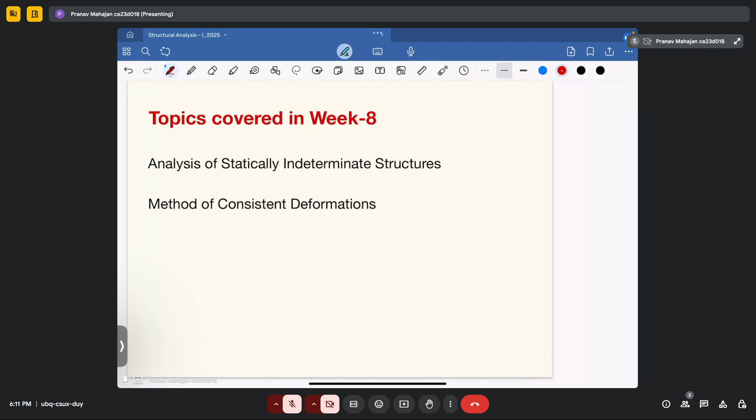Let me tell you a brief detail about method of consistent deformation. This method is also known as the force method.

So what you will do, you will apply a unit force and then you will see how the structure is behaving, and then we will apply the compatibility equation, and then we will determine the unknown force. So based upon equilibrium conditions as well as the compatibility equation, we will determine the unknown reaction, whatever the degree of static indeterminacy.

And finally, this method formulates a set of compatibility equations depending upon the number of redundants in the structures. Now, if I talk about the brief algorithm or brief steps that are involved in solving the problems related to force method, or for the current session, the method of consistent deformation.

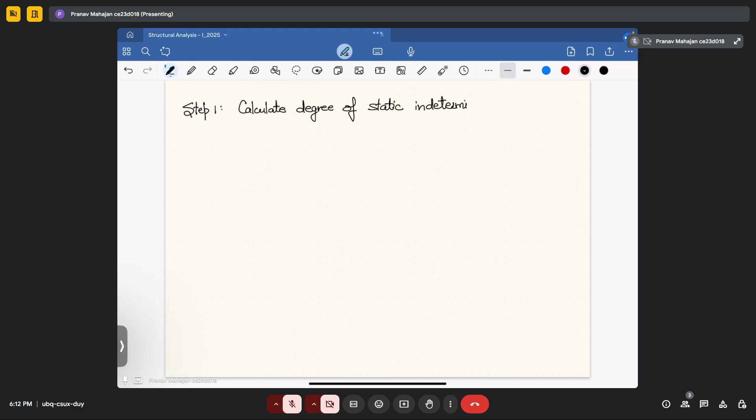So your step 1 includes calculation of degree of static indeterminacy. This is a brief overview about how the force method is utilized. So what you will do, you will first determine the degree of static indeterminacy. For trusses, we utilize m plus r minus 2j. This will give you the order of static indeterminacy in the structure. Then your second step includes...

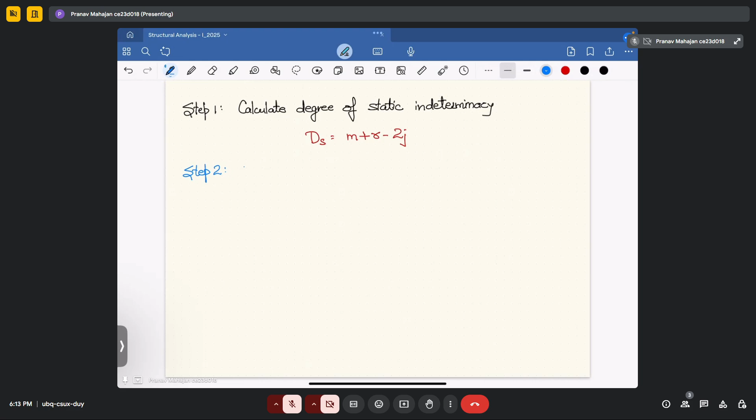Selection of redundant force and moments in the structure. So second step takes into account selection of redundant forces or moments that are there in the structure.

Okay, so your next step will tell you that you have to remove the indeterminacy and then find the solution of determinate structure. Like what you used to do in week number 3, wherein you have to calculate the deformations. So first you will calculate all the forces in the member due to external load, and when you apply the unit load, then you will see. So this is the third step, wherein first you will calculate the solution of the determinate structure.

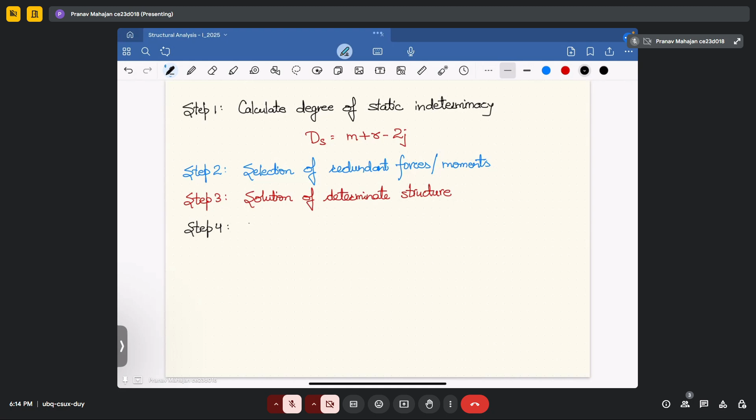So next what we will do, we will remove the redundancies from the structure, and then solve the redundant structure. Structure with redundant force is then analyzed.

And then finally what you will do, we will calculate deflection, for determinate structure in step number 3 that I have already mentioned, for determinate structure, and structure with redundant force. So for both these structures, we will determine the deflections.

And at last, what you will do, you will utilize compatibility equation and then determine the unknowns.

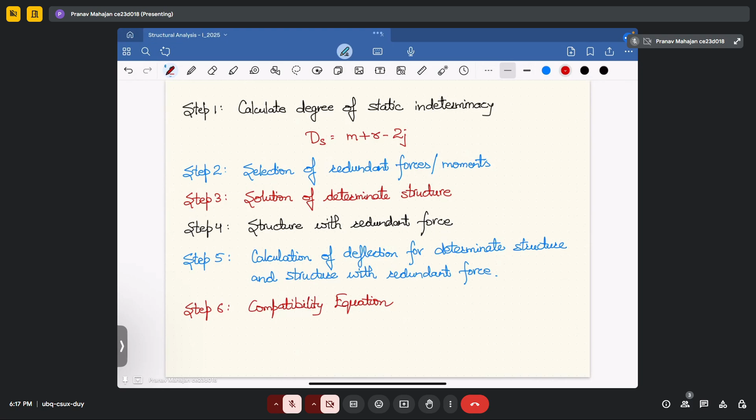Okay, so let's solve some problems related to that, that gives you clear understanding regarding this, and it will help you in understanding the concept further. So your first question is like a brush up for you regarding an indeterminate beam, how you will calculate the reaction forces. So what you will do in this case, as we have already seen in the previous week, for different beams, how you will determine the deflections at different points.

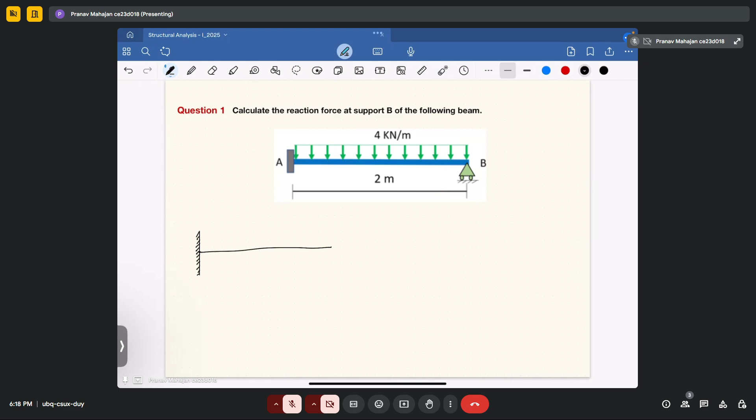So for this structure, this is your prop cantilever. Using the superposition principle, first I will split this whole structure into two parts. So what I will do, I will make this as a cantilever beam subjected to a uniform distributed load over the length.

Plus, what I will do, I will take another cantilever beam which is subjected to concentrated force, which is the reaction due to the prop support. I will mark it as RB at the free end of the beam. So now if I mark the loading, your loading is 4 kilonewton per meter along the length of 2 meters. Okay, so now you can see your structure A and structure B are now determinate.

Okay, so now what I will do, I know that due to the hinge support or roller support at point B, your deflection at the support B will be 0. That I already know, because at the support B you have the vertical reaction which is making the structure have 0 vertical displacement at that particular point. So that concept I have utilized, and that becomes my compatibility equation.

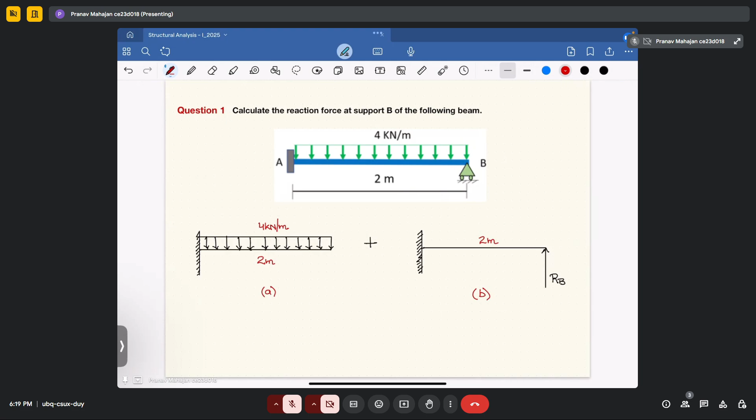Okay, so what I will do, I will first calculate the deflection due to structure A. Okay, so as I already know, due to structure A, my deflection at free end B, let me write it as end B, and this is your end A.

Okay, so due to structure A, deflection at free end B will be equal to - please see the previous results that we have already discussed. It would be WL to the power 4 divided by 8EI.

So in week number 7, we have discussed a table in which there are problems or standard results, how you will get the deformations at different standard results. And if you want to verify, you can use conjugate beam method and moment area method to get these standard results.

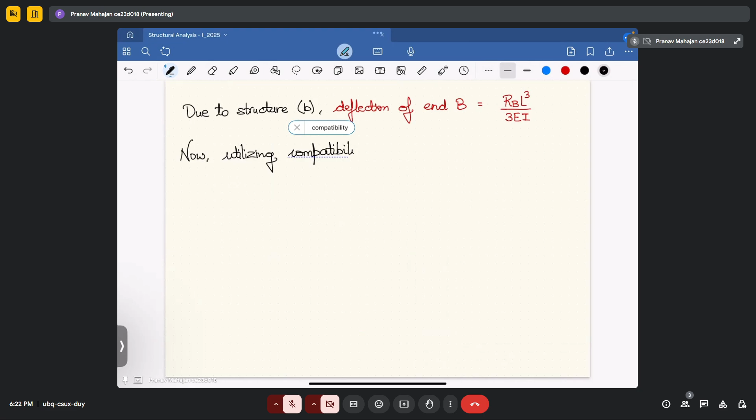Fine. So now utilizing compatibility equation, which says that deflection at roller support B, in case of propped cantilever beam, is 0.

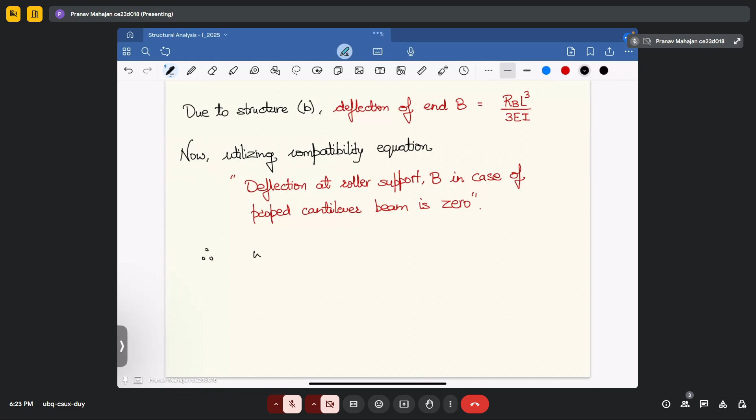Okay, so therefore your compatibility equation will become WL to the power 4 divided by 8EI minus RB L cube divided by 3EI. Let me write, due to structure B, the deflection to be negative, because out of this one will be positive. I think you can write this to be positive and this to be negative. Fine. Okay, so this will become equal to 0.

Now, if you solve for RB, you will get RB to be equal to 3 by 8 into WL. Now substituting the value of W and L in this, so what you will get, 3 by 8, your W is 4 and your total length is 2, and that will give you the reaction at B to be equal to 3 kilonewton.

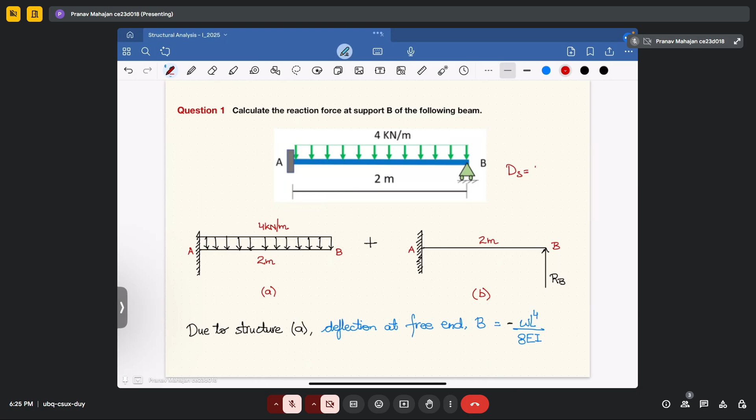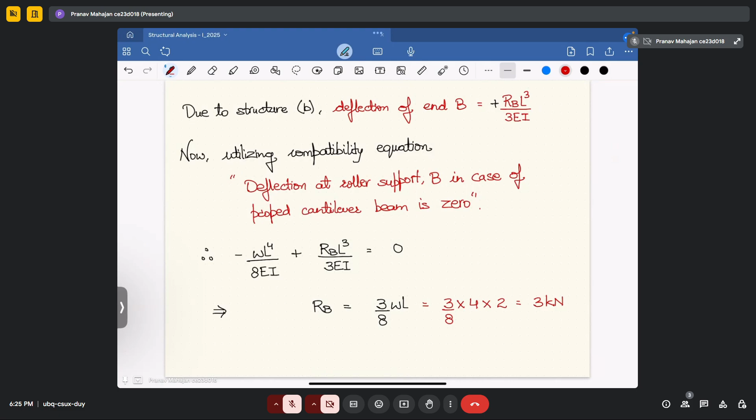So this is how we will solve the problems using force method, wherein first we will determine the degree of static indeterminacy. So in this case, the degree of static indeterminacy is 1. Okay, and then we will remove one redundant force, so that's why we have removed the roller support. And then we have solved the problem by considering the determinate structure, and then after that we have applied the unknown force and we have seen how the deformations are occurring at that, and then utilizing the compatibility equations we got to know the value of unknowns at different points. Okay, fine. So let's move further.

So your next question is, you have to determine the horizontal reaction force at support B of the following truss. Consider AE, or you can say axial rigidity, to be constant for all the members.

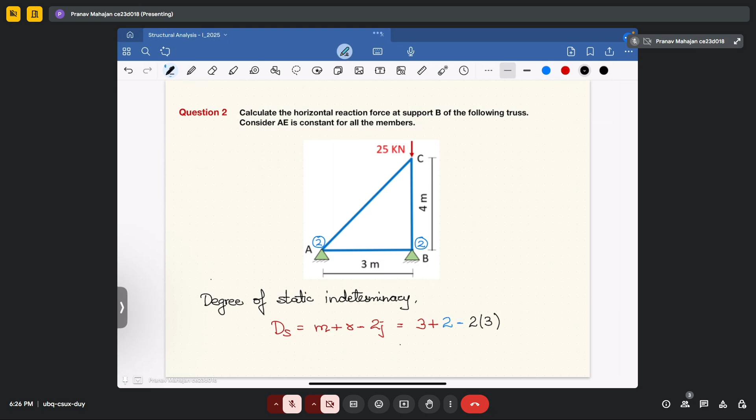Okay, so if you solve for this, first what we will do, we will determine degree of static indeterminacy. So for the case of truss, we already know ds will be equal to m plus r minus 2j, and in this case your m is 3. Your reactions here are, at A reactions are 2, at B reactions are 2, horizontal and vertical. So I think your reactions are 4 - I wrote it wrong. So your reactions are 4. Number of joints are 3, and that will become 2 into 3. So you will get your degree of static indeterminacy to be equal to 1.

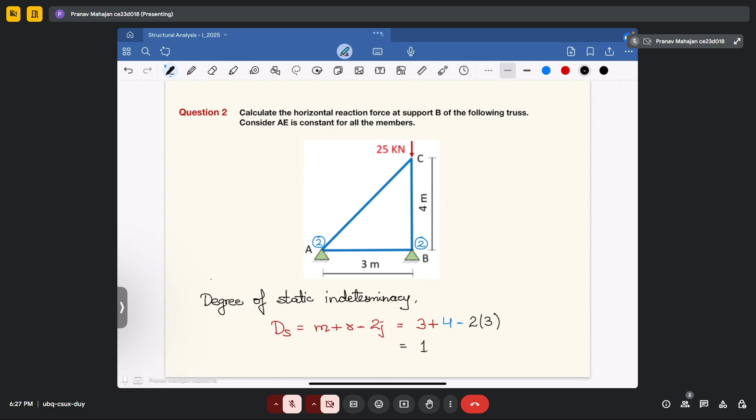So that means your structure is indeterminate of first order. You can remove either one of the forces which are unknown and then try to solve the forces.

Okay, so let's assume in this case your horizontal reaction at support B to be the redundant force. So let me write that - let the horizontal reaction at support B be the redundant force. Fine.

Okay, so then using method of consistent deformations, so what you can say is that your summation of PKL upon AE minus HB into summation of K square L upon AE to be equal to 0.

So now you have one truss, and it is subjected to a point load at the top, and you have the corresponding hinge at one end, and because of removing the horizontal force, this support will serve as a roller on the other end. So now your structure is determinate.

This is your length of 3 meter. This is your maximum load, or the load that is occurring at the top, 25 kilonewton, and this length is 4 meter. Now we have to find the forces in all these members.

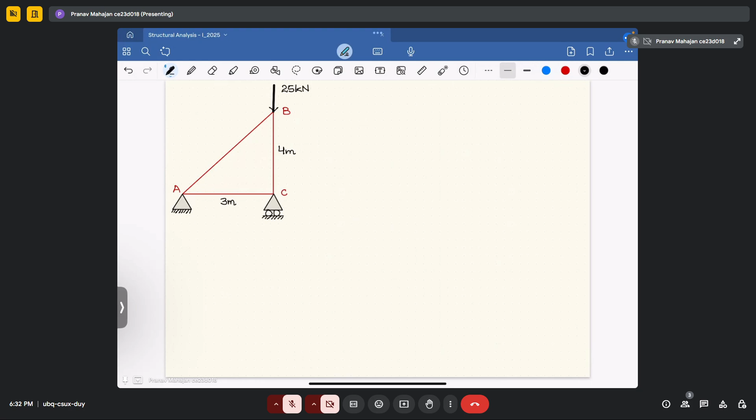Utilize the principle of method of joints to determine the reaction forces in all the members. So your forces in the member, how will it look like?

I am writing the values, and you will confirm that by applying the method of joints. So in this, how many members do you have? You have AB, BC, and CA.

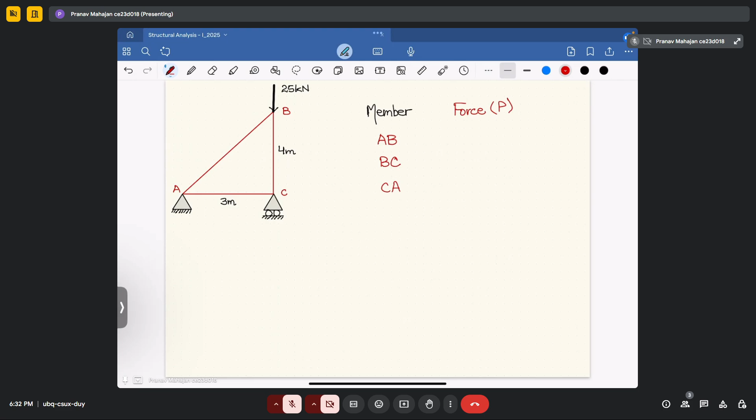So if you start with joint B, in case of joint B, if we take summation of horizontal force to be equal to 0, you will get the force in member AB to be equal to 0, and your force in member BC will come out as 25 kilonewton.

Now, if I take another joint, that is joint C, as we have already calculated, you will get the BC force to be 25, that means your reaction force will also be 25. So if we take the horizontal force equal to 0, that's why the force in member AC or CA will come out to be equal to 0.

So now you have calculated all the values of P. Now you have to calculate the values of K. So how will you do that? For that...

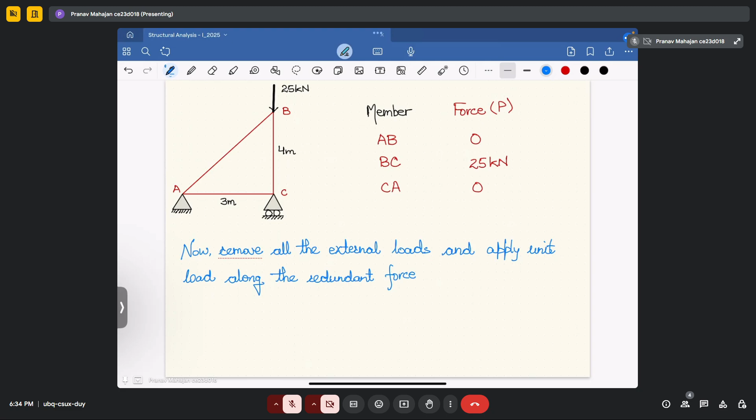Now we will remove all the external loads and apply a unit load along the redundant force. Since we have removed the horizontal force as the redundant force, we will apply unit load in this direction, and the member forces due to that will be represented as K.

So the member forces due to unit load is represented as K. Let me take this diagram and apply a unit load.

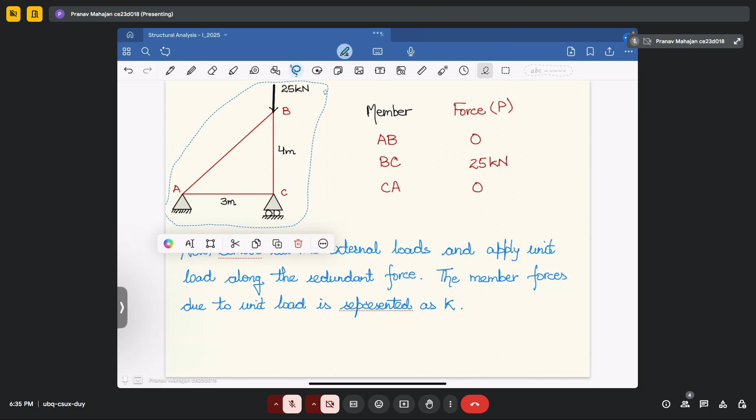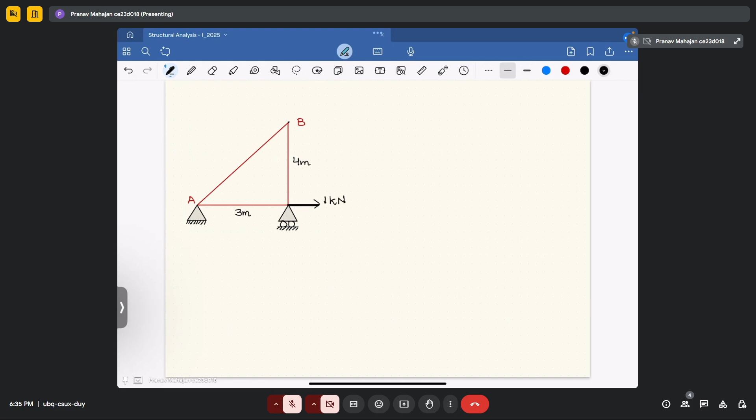So now in this case, you will not be having this external load. Now what you will do, you will apply a unit load in the horizontal direction. So now due to this 1 kilonewton load, what will be the member forces in the structure?

Let me write again the member and the force. In this case, I am representing the force as K. And now your members are AB, BC, and CA.

So if you take joint B, summation of horizontal force equal to 0 gives member AB equal to 0. Summation of vertical forces equal to 0 at joint B gives member BC having 0 force. Whereas when you take joint C and apply summation of horizontal forces equal to 0, you get AC to be having 1 kilonewton as the load.

Now what you will do, we will substitute all these forces in this equation that we have already written as the compatibility equation. We will substitute all these values and then determine the unknown force.

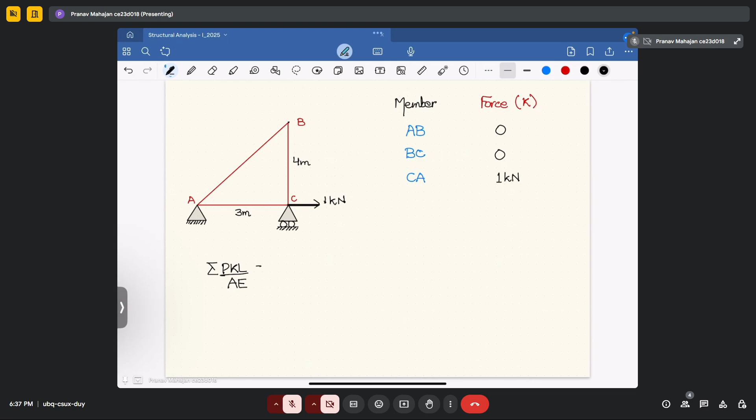So your summation of PKL upon AE in this case is coming out as 0. Your summation of K square L divided by AE is coming out as 1 square times L, which is 3, divided by AE, and it is equal to 3 upon AE.

Now I am substituting all these values in that equation. So what you will get? Therefore 0 plus 0 minus HB into 3 upon AE equal to 0, and from this you will get the horizontal force to be 0.

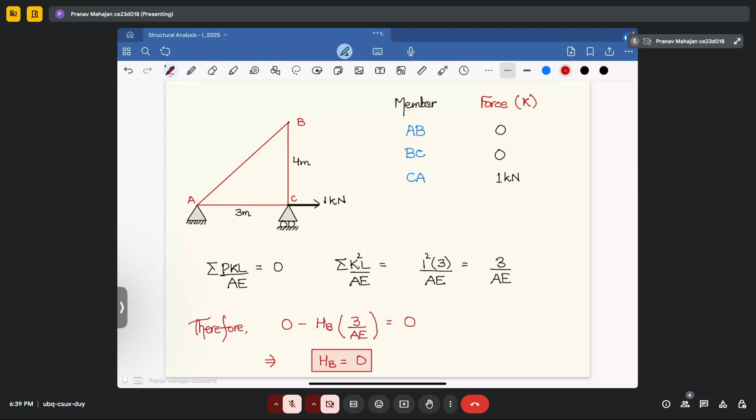Now you understood how to solve the problem using the method of consistent deformations. So let's solve one more problem related to this.

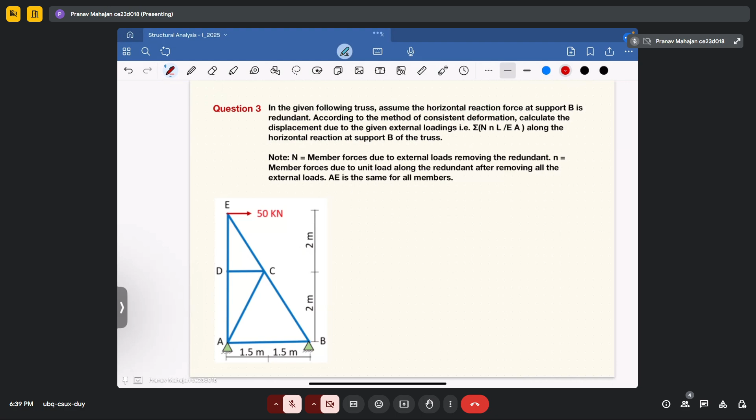So in this, it is given to you that in the given following truss, assume the horizontal reaction force at support B is redundant. Okay, so now in the question it is already given to you that it is redundant, but if it is not given to you, you have to first determine the degree of static indeterminacy, and in this case it will come out to be 1, and then you have to choose either the horizontal force at support A or horizontal force at support B to be the redundant force, and then solve accordingly.

Okay, so first, what is given in the question? In the given following truss, assume the horizontal reaction force at support B to be redundant. Now, using the method of consistent deformations, calculate the displacement due to the external loading. That means you have to calculate this summation N n L upon AE.

Note, N is the member forces due to external load, removing the redundant. Small n is the member forces due to unit load along the redundant force after removing all the external loads, and AE is considered to be constant for all the members. Okay, so this is similar to what we have previously covered.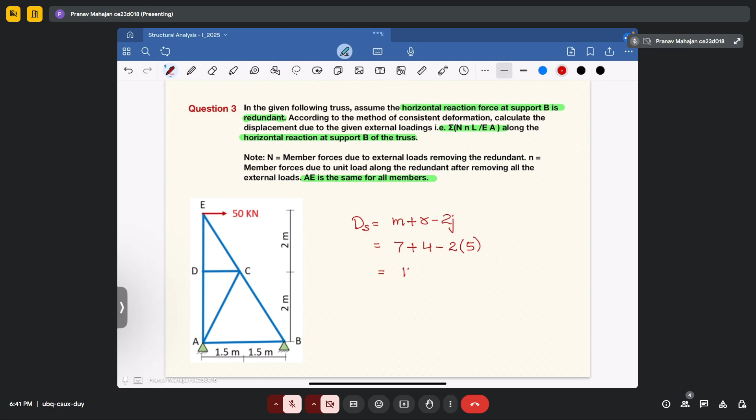So if you say in this question, if you start with degree of static indeterminacy, so your DS will come out as m plus r minus 2j. In this, how many members you have? 1, 2, 3, 4, 5, 6, 7. 7 plus 4 reactions minus number of joints: 1, 2, 3, 4, 5. That means 11 minus 10 equal to 1.

Okay, so in this question, it is given to you: horizontal reaction force B to be redundant.

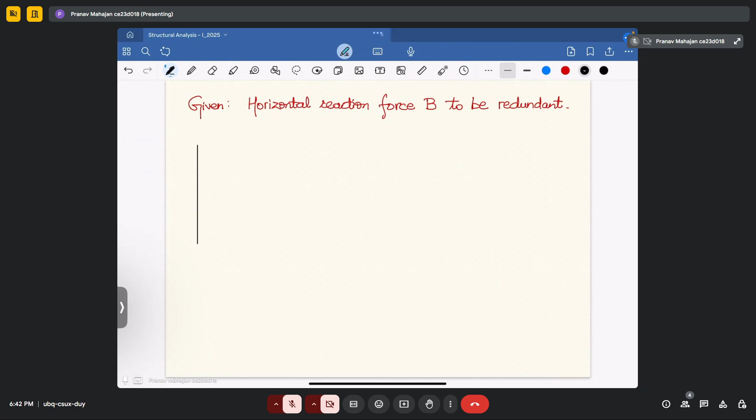Okay, now what you will do? You will remove the force and then draw the structure. So let me draw the structure by removing the redundant force. Okay, so this is how the structure looks like.

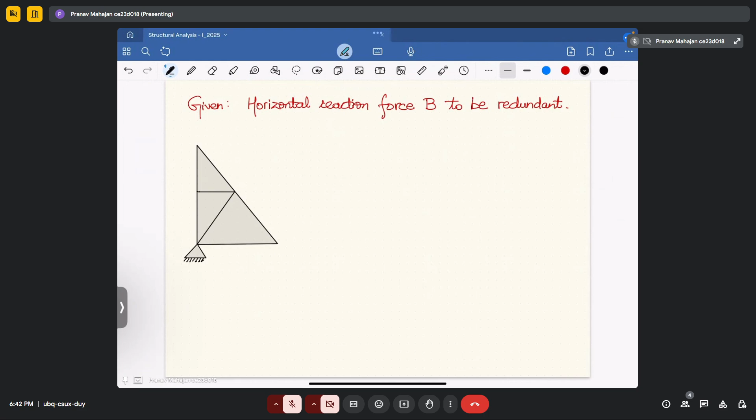Fine. Now you have the hinge support at end A and roller support at end B.

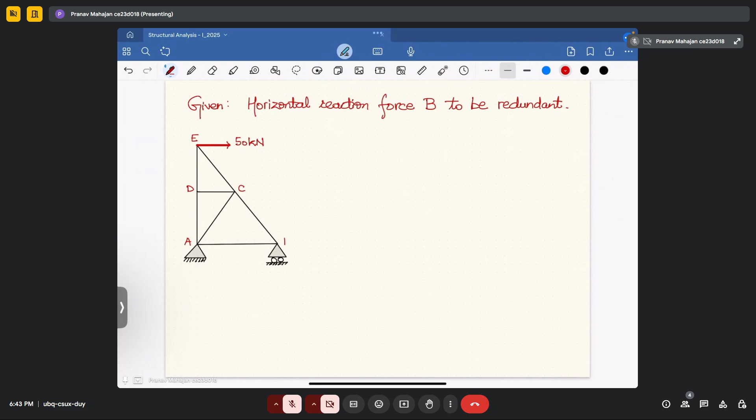Fine, now in this, how many external forces are given to you? One horizontal force is provided to you and it has a value equal to 50 kilonewton. And if I mark the supports or joints, it is like this. Okay, this dimension is 3 meter, up to this level it is 2 meter, and from this to this also, it is 2 meter.

Fine. Now your structure is determinate as you have removed the redundant force. Now you have to determine all the forces in the members. You have to determine member forces in the given truss due to the external force of 50 kilonewton. Okay, so how will we start?

We can start by considering the moment about A to be equal to 0. So if you do that, what you will get: you will get RB into 3, since that is in anti-clockwise direction, plus 50 into 4 to be equal to 0.

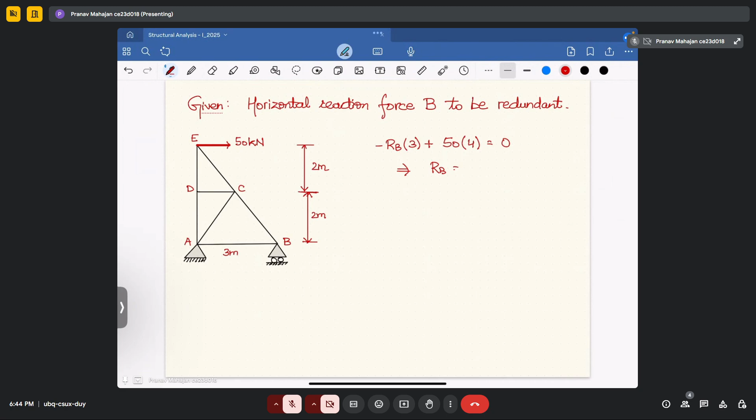And from that, you will get RB to be equal to 200 upon 3 kilonewton. Okay, so since your RB is coming out to be positive, that means your RB is this 200 upon 3 kilonewton. And there are no vertical forces, so that means your reaction at support A will be like this.

Fine. Now, if I consider summation of horizontal force to be equal to 0, that means at end A, you will also have one horizontal reaction equal to 50 kilonewton.

Okay, now what you will do? First, in this truss member, we have to determine all the member forces. So we start with finding out the zero force members. Okay, in this case, you can see that force member DE and AD are collinear, and whatever member is perpendicular to it will have force equal to 0. So that means your CD will be a zero force member. Okay, so that means now CD is removed.

Now if we take member CE and member BC, they are also collinear. So any member coming out of it, that means member AC, that will also be a zero force member. So we are marking that also to be equal to 0. Now our truss is simplified. We are only expected to calculate 3 forces.

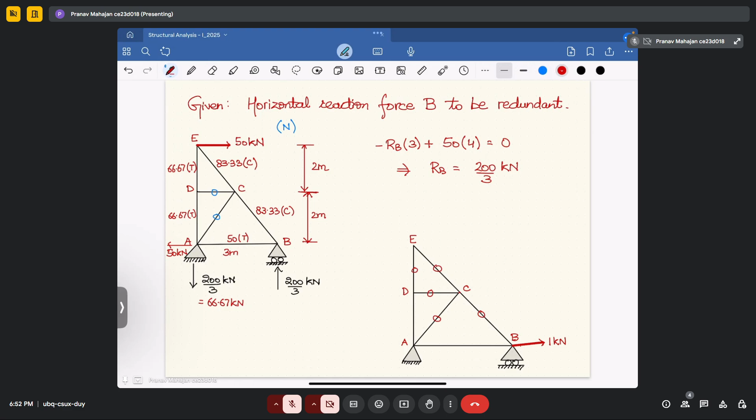Now, we will take joint E. In joint E there is no force, so your member forces DE and CE will also be 0. If you take joint C, there is no additional force, so your BC will also come out equal to 0. If your BC is equal to 0, then taking joint B, you will get AB as 1 kilonewton tensile force, and your AD will be equal to 0.

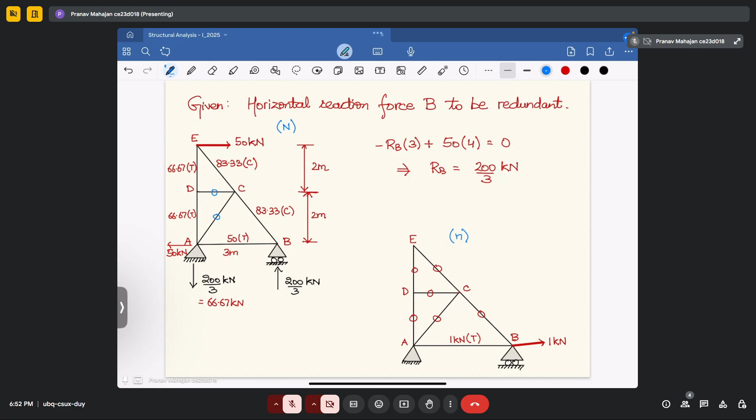So these are all your small n values, and small n is already depicted in the question as forces in the members of the truss due to the unit load applied as a redundant force. So how will we solve this? We will make a table in which we will write the members.

So how many members do we have? We have AB, BC, CE, ED, DA, and one more is also there, DC and CA. So total 7 members are there.

Now we will write the capital N force. So how much value did you get for capital N, and how much value for small n, and then we will apply summation of n and L. Or I think L should also be written, or no, we will directly write n and L.

So what are the values of capital N you got in the truss? For AB it is 50, BC is minus 83.33. I am taking compressive forces to be negative. CE like this, ED is 66.67, DA is also 66.67, your DC is 0 and your CA is 0.

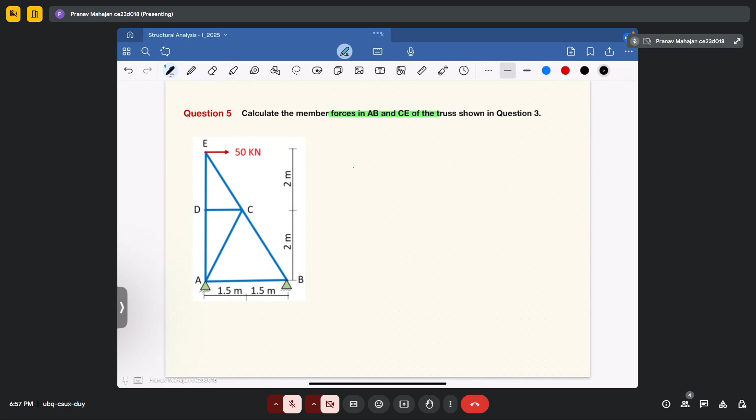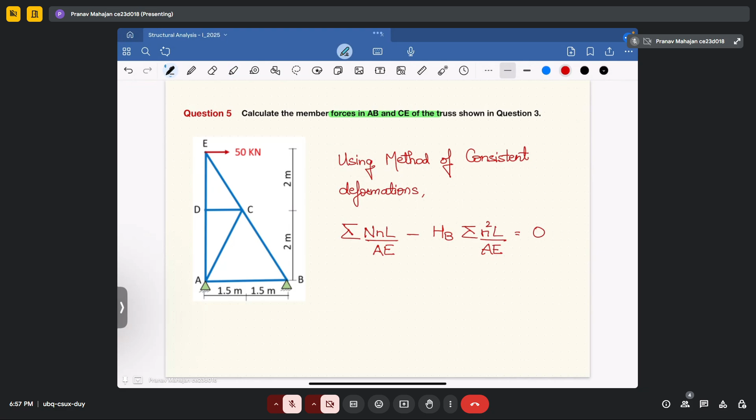Using method of consistent deformations, what we have already written: summation of N and L upon AE minus HB times summation of n square L upon AE equals 0. Your summation of N and L upon AE we have already calculated as 150 upon AE, minus summation of horizontal force into summation of n square L upon AE, which we calculated as 3 upon AE, and that comes out equal to 0.

Now if you try to solve for the value of horizontal force HB, it will come out as 150 upon 3, equal to 50 kilonewton.

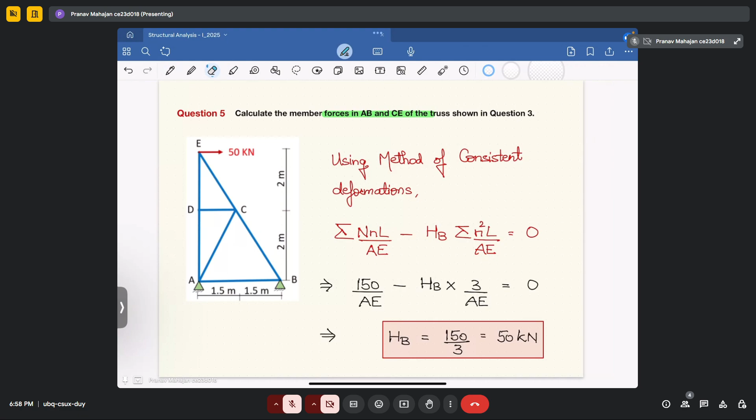Now after calculating the value of horizontal force, if you are expected to calculate member force AB and CE, how will you calculate it? So member force AB will be equal to FAB.

This will be equal to capital N AB minus small n AB into HB. So that will be equal to capital NAB, which we calculated as 50, minus small NAB, which is 1, times your HB which you calculated as 50, and that will be equal to 0 kilonewton. So your force in member AB comes out as 0.

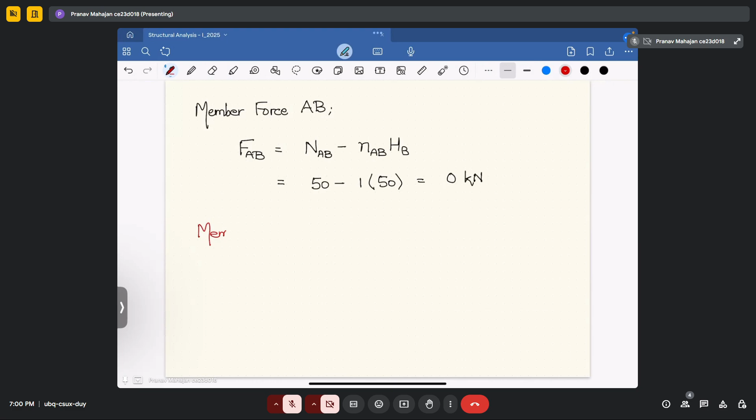Whereas for member force CE, your force CE will be equal to capital N of CE minus small n of CE into HB. That will be equal to capital N of CE which is minus 83.33, small n of CE is 0, into 50, and that will be equal to minus 83.33 kilonewton, which will be a compressive force.

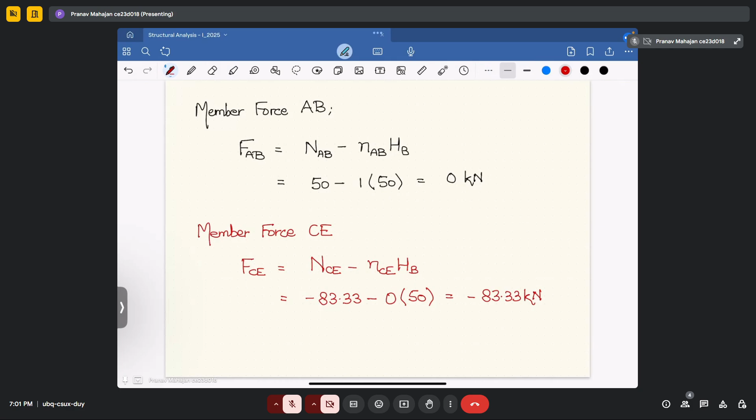So this is how you will solve problems related to the method of consistent deformations. Now one more problem is there: what happens when your degree of static indeterminacy is not equal to 1? How will you solve the problem if the degree of static indeterminacy is more than 1? Let's see this question.

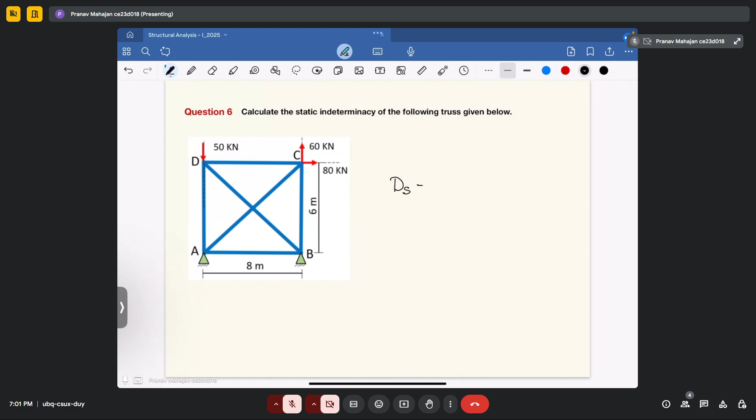So this is the question. It tells you first to calculate the degree of static indeterminacy. So first, how will you calculate static indeterminacy? That will be equal to m plus r minus 2j.

In this question, how many members are there? 1, 2, 3, 4, 5, and 6 — total 6 members. Reactions are 4 because 2 hinges are there, minus 2 times number of joints, which are 1, 2, 3, and 4. Internally there is no joint, they are overlapping members. Here you can assume that member AC and member BD are overlapping members, not jointed at the intersection point. So here what you get is 10 minus 8, so your DS comes out as 2.

So now earlier in all the problems you were getting the degree of static indeterminacy equal to 1, but now in this case you are getting it as 2. So what will you have to do? In this case, the structure is indeterminate of second order.

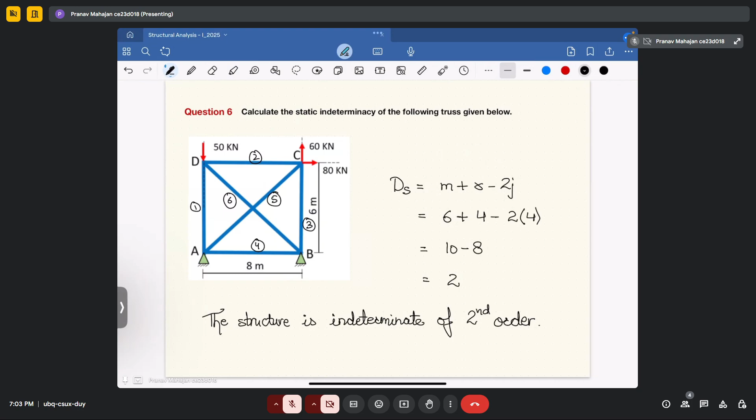Fine, let's see how we will solve this problem. To solve it using the method of consistent deformation, we need to solve the equation, which has two unknowns, d1L and d2L, plus the flexibility matrix multiplied by the unknowns, which are the redundant forces in the structure, and that will be equal to zero.

This is your consistent deformation, similar to what you have covered earlier, wherein d1L here is given to you as the assumed displacement along the member force BD and along the horizontal direction at support B respectively. These are due to external loads after removing the redundants from the structure, whereas F is the flexibility coefficient and capital H is the redundant force.

Like you used to take this as HB in the previous question, and this flexibility matrix is equal to small n. So I will write it as the summation of capital N and L upon AE — this is your capital D — and this is small n square L upon AE, and H1 and H2 are your HB. This is how you used to solve it previously.

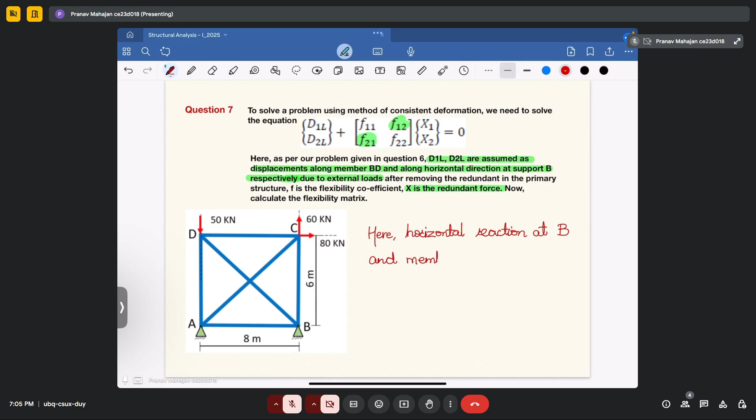As already given in the question, the redundant forces are the horizontal reaction at B and the member force BD. This is considered as redundant. You can choose whatever you want — if you want to take AC also, you can take it as a redundant force. But in this current situation, as given in the question, we are taking the horizontal reaction as well as the member force BD to be the redundants.

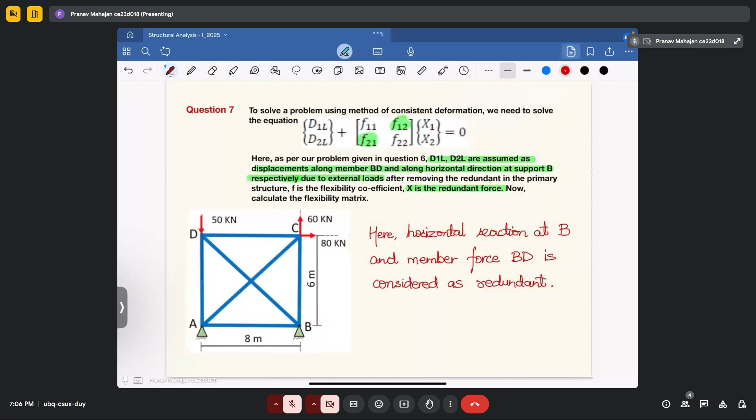Now what we will do: we will remove these redundant forces and determine the member forces due to external loads. First we will draw the diagram that will clear all the doubts.

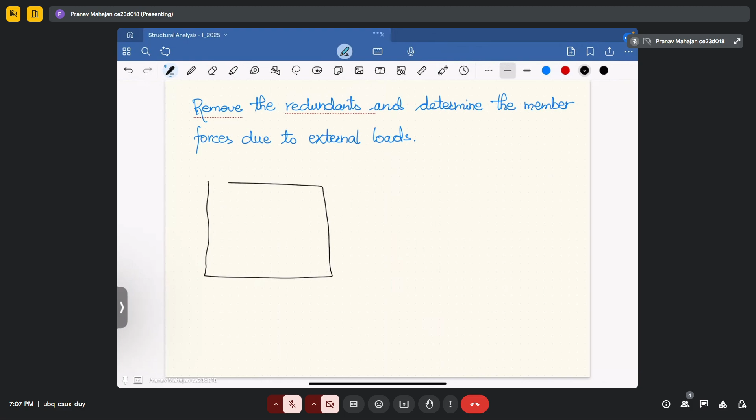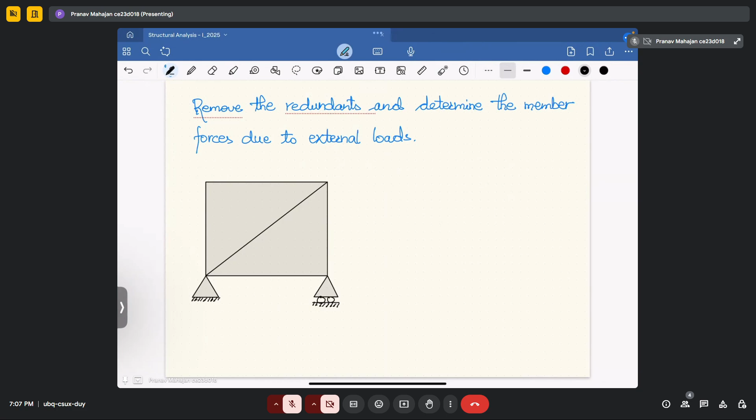Now since the reaction force is removed, a roller support will come at support B. Talking about the external forces expected or given in the question, you are having reaction forces in this structure: 50 kilonewton, 60 kilonewton, and 80. And if I mark the support reactions, this is A, this is D, this is C and B.

These are 8 meter and 6 meter respectively. Now what I need to do is calculate all the capital N values in this structure after removing the redundant forces. Let me bring this diagram to the center.

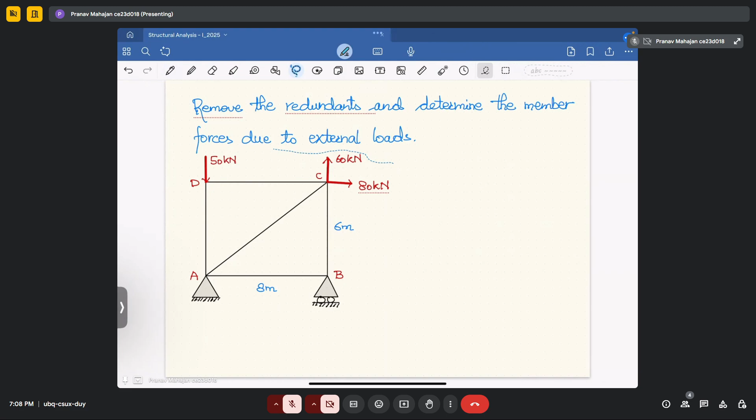Now we have to calculate all the reaction forces. This is your capital N, I will write it here. Now, if we take joint D, taking the summation of vertical forces to be equal to zero, you will get member AD equal to 50 kilonewton as the compressive force, and member CD to be equal to zero.

Again, if I take the reaction forces in this case — if you determine the reaction force RB, taking moment about A to be equal to zero, you will get minus RB into 8 minus 60 into 8 plus 80 into 6 to be equal to zero, and from this you will get reaction RB to be equal to 0.

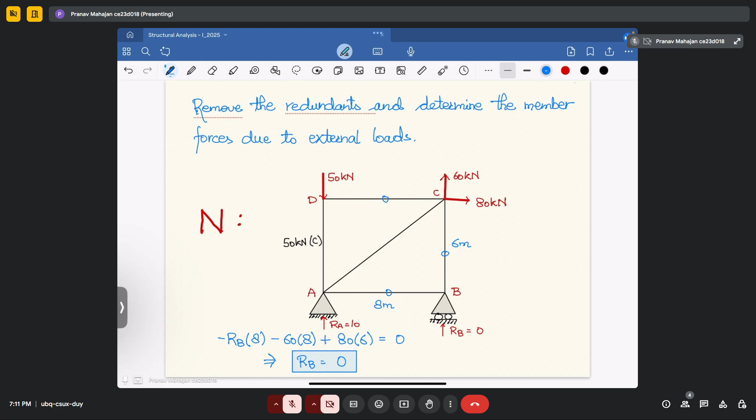And since these are zero, that means for member AC, if you take joint C and apply the equilibrium equation, you will get the member force AC to be equal to 100 kilonewton, and that will be a tensile force. You have to solve this problem using the method of joints at each point to see what forces you get in the structure.

Now what I will do is remove all the external loads and apply a unit force along the member BD. Let me take this as a diagram and see how I can use this.

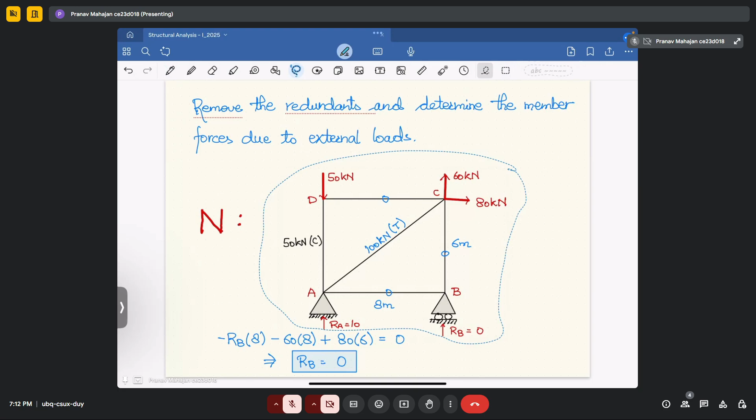Okay, now I am solving for N1. Let me write it here. This is N1, where N1 is happening when you will remove all the external forces.

So I am removing all the external forces, and I will apply unit load in the redundant force direction. So this is your redundant force direction. This is your 1 kilonewton force. This is again your 1 kilonewton force.

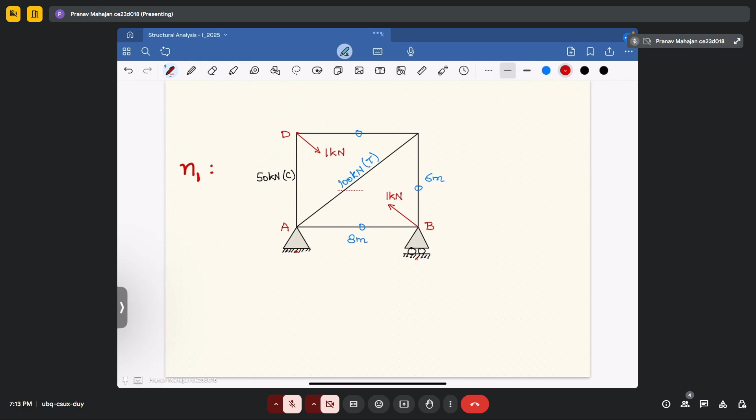Now if I remove, so now I have to calculate the forces due to these loads in the structure. So in this case, these values will not be 0.

Now we have to calculate the member forces in all of these. So how will you do it? You will take one joint and then try to determine the reaction forces.

So in this case, if you take summation of vertical forces to be equal to 0 in member BC, oh sorry, at joint D, so you will get the forces to be equal to 0.6 compressive in this case and 0.8 compressive in this case. Whereas if you take joint B, you will get 0.6 compressive here and 0.8 compressive here.

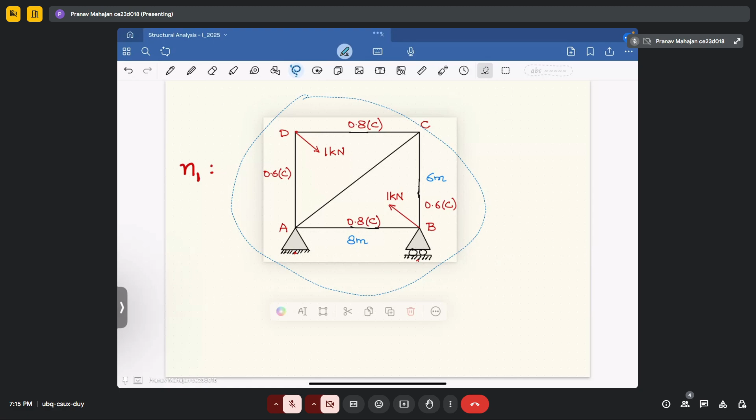So in that case, what will happen? So let me write it to be N2. So in that case, let's remove first all the forces. These values will not be there.

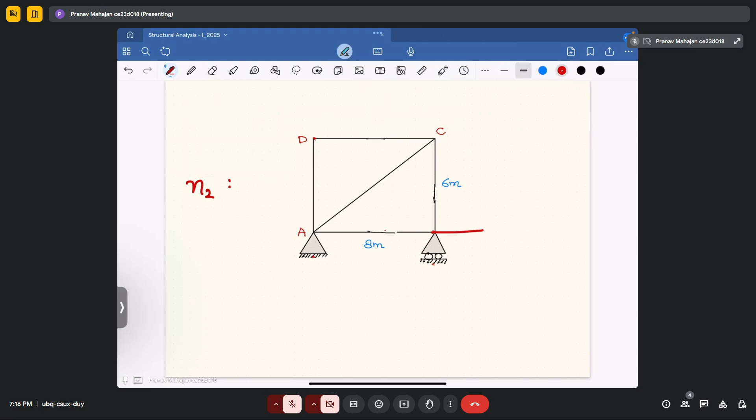Now what we will do, we will apply a unit load along this direction, and this will be equal to 1 kilonewton, and due to this you will get 1 kilonewton as tensile force in member AB, whereas your rest all members will have 0 force.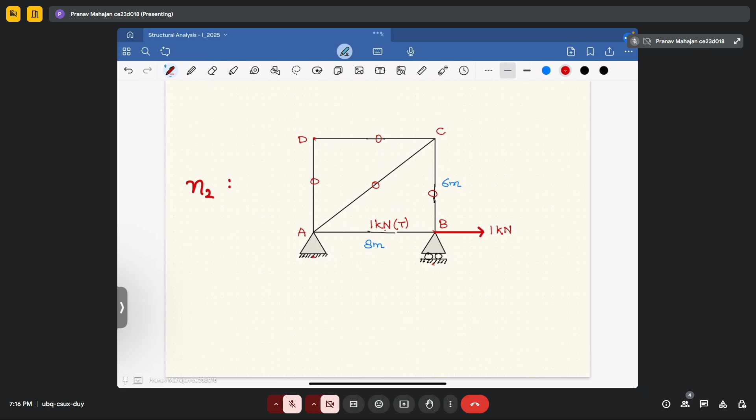Okay, now you have calculated all the values N1, capital N, small n1, small n2. So I will make a table that will be easy for you to understand. So you have member. So how many members will be there? 6 members will be there.

One is AB, AD, AC, BC, CD, and BD. Okay, so all 6 members now you have calculated.

We will write their corresponding lengths. So their lengths are Li: they are 8, 6, 10, 6, 8, and 10.

Now I will write the corresponding capital Ni values for them. They are 0, minus 50, wherein I am considering all the compressive forces to be negative, 100, and rest all are 0. Okay, this is what we have calculated.

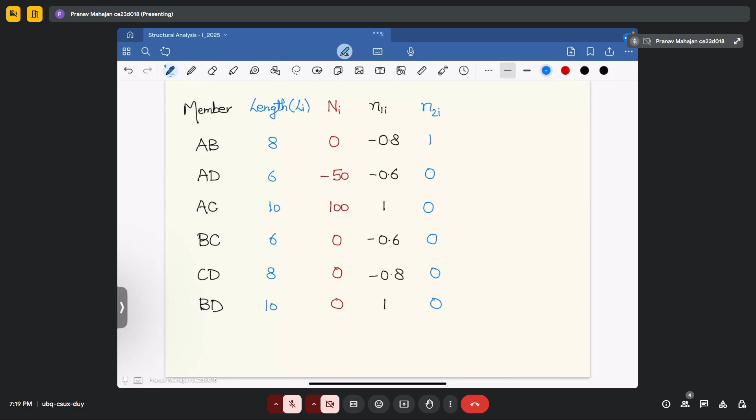Now you will be having the combination of the values. That is, okay. So in the previous case, it is told to you to solve the problems and calculate the flexibility matrix.

So to calculate the flexibility matrix, how will you do it? So your flexibility matrix has four values: F11, F12, F21, and F22. So your F11 will be equal to summation of N1i square Li upon AE.

Okay, and that is coming out, if you solve that, it will come out to be 34.56 upon AE. Fine. And I have calculated.

What you have to do, you have to take N1 square L, and then you have to find out. Whereas your F22 will be summation of N2i square Li divided by AE. If you do that, you will get the value as 8 upon AE.

Now talking about F12, so your F12 will be equal to summation of N1i, N2i, Li divided by AE, and if you do that, you will get the value as minus 6.4 divided by AE.

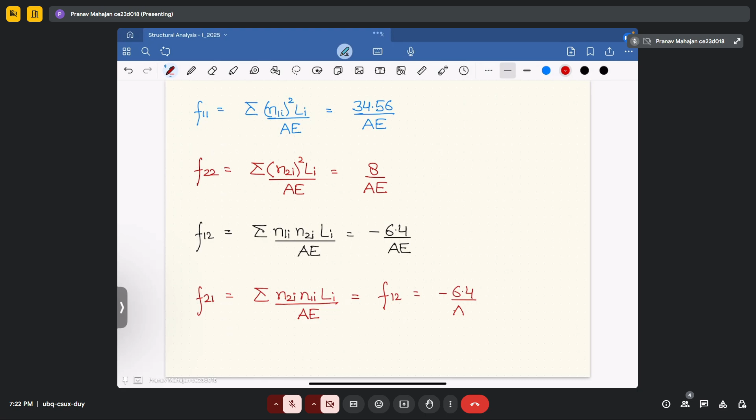Similarly, if you do for F21, that will be equal to summation of N2i, N1i, Li upon AE, and that will be equal to F12, and it will be equal to minus 6.4 divided by AE.

Okay, so your flexibility matrix, hence the flexibility matrix F will be equal to 1 upon AE, I am taking out, so it will be 34.56, minus 6.4, minus 6.4, and this will be 8.

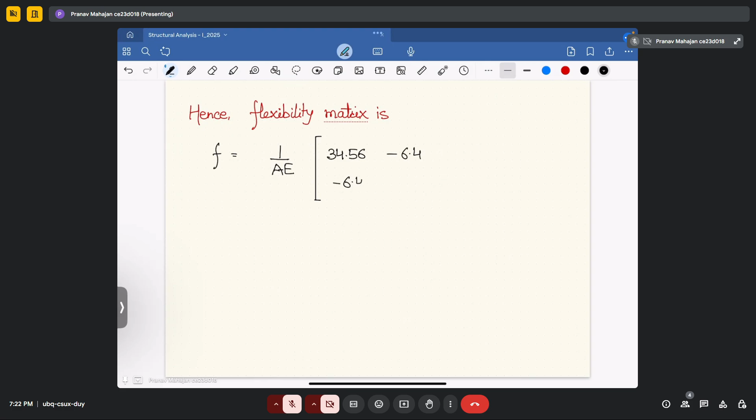Okay, so this is how you will calculate the value of flexibility matrix.

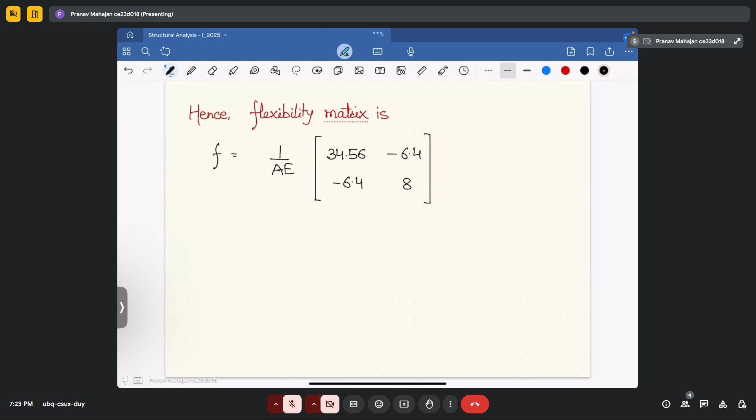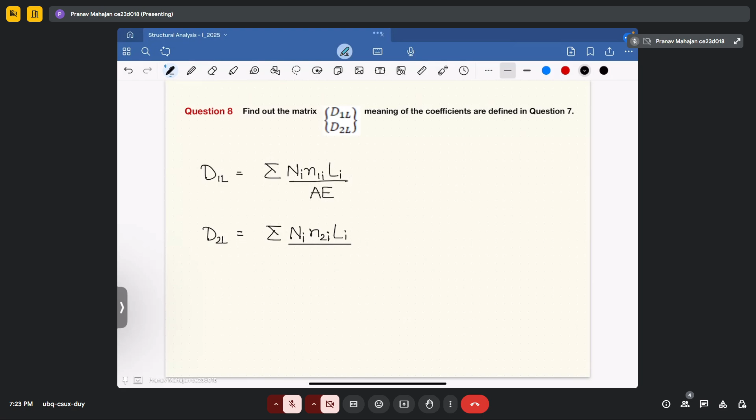Now the next question is a continuation of the previous one. Here it is expected that you calculate D1L and D2L. Your D1L is equal to summation of capital Ni, n1I, Li divided by AE, and your D2L is equal to summation of Ni, small n2I, Li divided by AE. Using the previous table, if you determine the values, they will come out as 1180 divided by AE, and another is 0.

That means your D matrix will be 1 upon AE, 1180, and this is 0, like this.

Now in the last question, it is given to you that you have to calculate the member forces in BD. So to determine the member forces, first we have to determine the unknown reactions or redundant forces. We will utilize the compatibility equation given in question number 6, determine the reaction forces X1 and X2, and after that calculate the member force BD.

So what is the compatibility equation given to you? That is D1L and D2L. It will comprise of one matrix, that is D, which you have already calculated in the previous question, plus the flexibility matrix F11, F12, F21, F22, multiplied by the unknown forces, or redundants. The notations of redundants are X1 and X2. In this case, our redundants are: one is the horizontal force at support B, and another is member force BD. And that will be equal to 0.

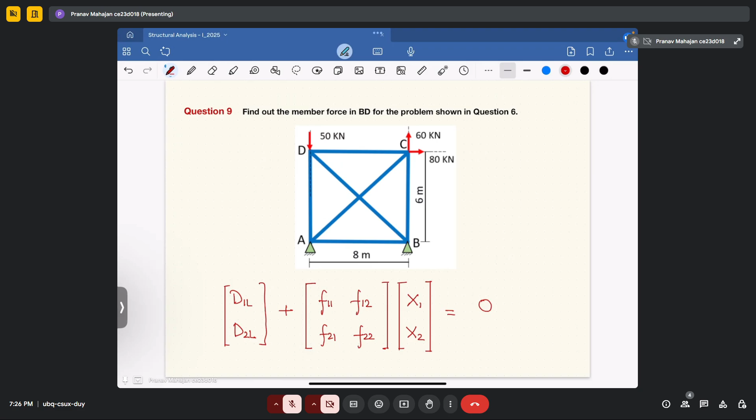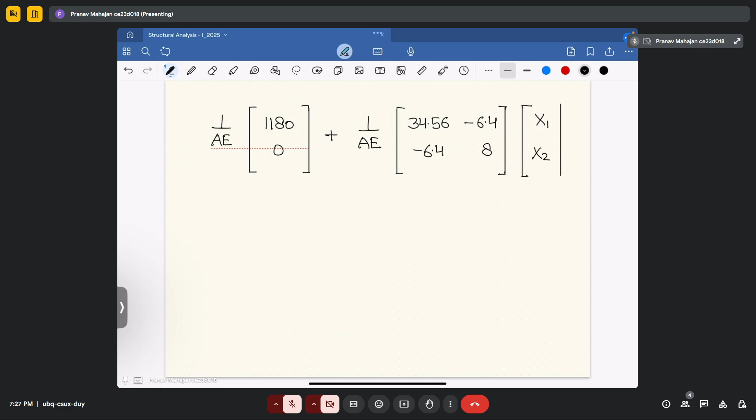You already have the values of matrix D and flexibility matrix, so substitute that. That will be equal to 1 upon AE times [1180, 0] plus 1 upon AE times the flexibility matrix [34.56, -6.4; -6.4, 8], multiplied by the unknown forces X1 and X2, and all of this is equal to 0.

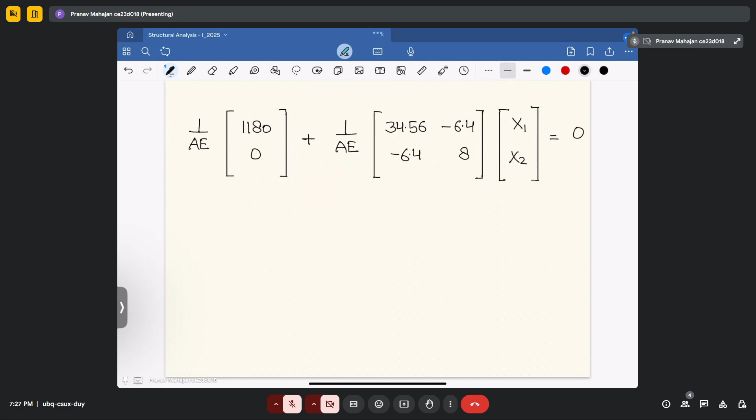So solving the above, we get X1 to be equal to minus 40.08, and your X2 is equal to minus 32.07.

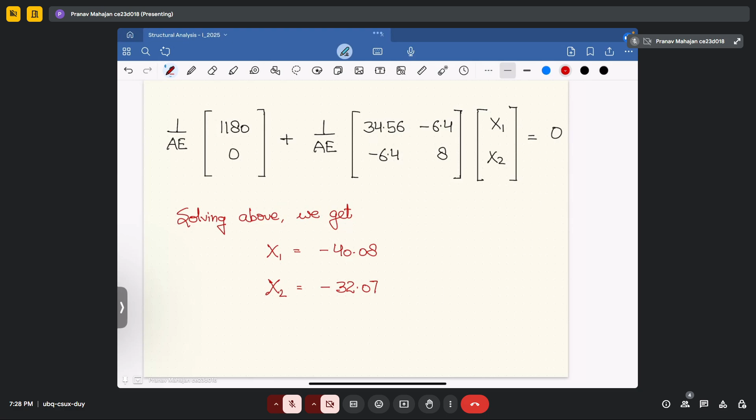0.07. Okay, now to determine the member force BD, your FBD will be equal to capital NBD that you have calculated from the determinate structure, plus small n1BD, which is when you have applied the first redundant and due to that you get the unknown as X1, plus small n2BD, where you got the reaction force as X2 in this case.

So if you substitute all the values, your capital NBD is 0, your small n1BD is 1 into minus 40.08, and your small n2BD is 0. If you multiply by the unknown force, that is 32.07, you get the value of FBD to be equal to 40.08 kilonewton. This is your compressive force FBD, because we have taken the value to be negative as compressive.